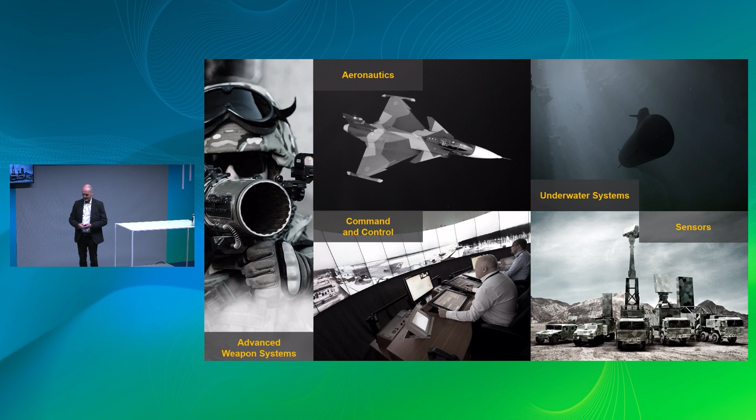If we dive into Dynamics, I will do that for a reason. I'll show you a couple of cases from there, and we have five different portfolios within Saab Dynamics alone. One example comes from the anti-ship missile hanging on the Gripen fighter, in missile systems, and one from underwater systems.

Now, war is a nasty business. Nobody wants it. However, we never seem to be able to get rid of it. I chose as an illustration this one, from the war between Israel and Hamas in 2021, not knowing that we would have another war on our hands right now. It's a good illustration because on the right you have the simple ballistic rockets that Hamas launched, I think over 4,000 of them in a few weeks. And those simple ballistic rockets cost under $1,000 to produce.

Israel responds with its Iron Dome air defense, one of the best in the world. But those are guided missiles, as we can see in this illustration. Over 4,000 rockets were launched. The quality was lousy, so a quarter of them fell down in Gaza or in the sea. But over 3,000 reached Israel, so they needed to launch their missiles to take them out. Over 3,000 missiles. Imagine the cost. They took most of them down, but not all.

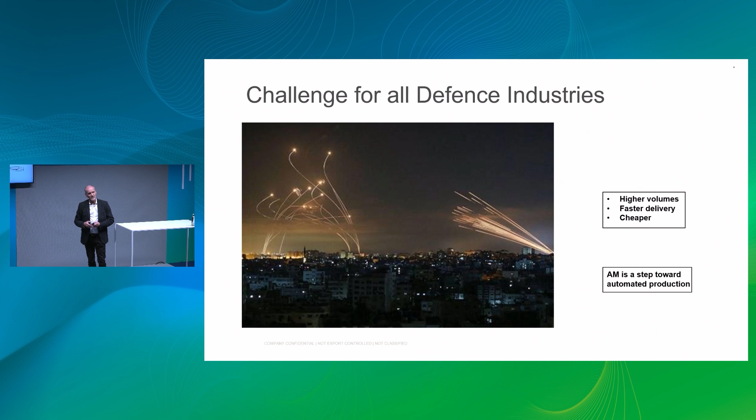So additive has been important for Saab for many years now. We started about 9-10 years ago. We had an assignment from the management team at Saab to collaborate between these different business areas that have such different product portfolios. So I have a Saab AM Group with people from Aeronautics, Surveillance, Dynamics, and Kockums, and also the tech consultancy service, Combitech. Our mission is to devise the strategy for Saab on additive and execute it.

We drive the collaboration within the Saab Group, despite the different product portfolios. We develop Saab common solutions. There is no need to have different solutions just because we can; it's smarter to keep common solutions as much as possible. We disseminate knowledge. Another exhibitor here at Formnext is AMEXCI, a Swedish joint venture which Saab co-owns, and this group is also the point of contact for Saab people towards AMEXCI.

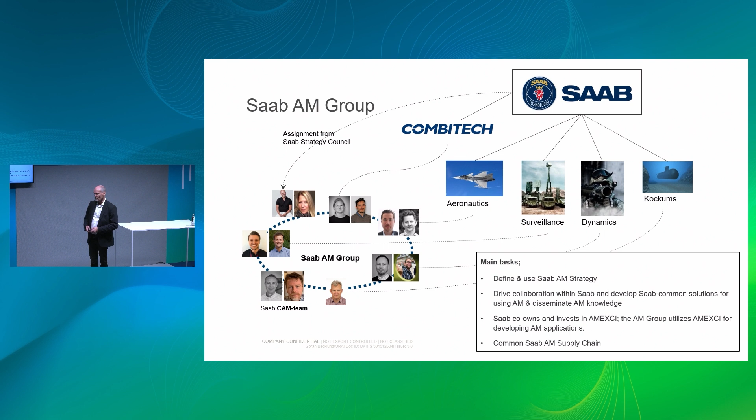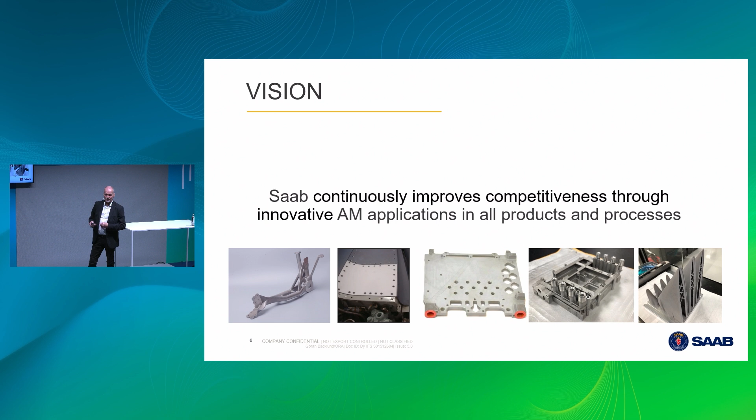And we are devising a Saab AM supply chain because we don't produce our metal parts in-house. Not yet. We will, to some extent, of course, but the strategy now is to use suppliers. Our vision is that we go smarter with additive and improve our competitiveness by being innovative in all our products and processes. And we have some metrics on this.

And I will just show you some examples of applications that we have. One of the first was actually a cool plate. To the left there, it's about this big. And on both sides, you have high power electronics, gallium nitride. And I mean high power. At the surface of the chip, you have a power generation that almost equals the surface of the sun. So if cooling fails, it burns immediately.

And this cool plate is hollow. You have coolant running in, here spreading in the plate, picking up the heat and exits. It's just 4 millimeters thick. And this is an AM design, and the plates sit on a flow distributor, 4 of them in one distributor, and it's all printed in aluminum. Sorry, that was the wrong direction.

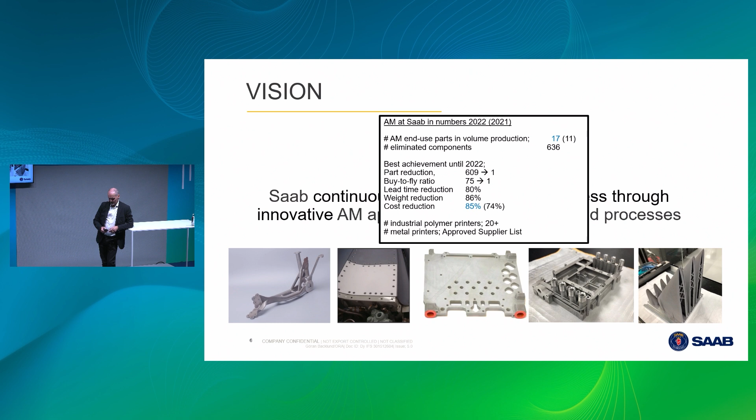Now, it used to be brazed. Brazing is always a risk on leakage, but this one is leak-proof. It's just one part. It's lower weight, which is of great importance because it's a flying system. And the best of all, it's a better cool plate. It picks up more heat than any previous cool plate we had. And you reduce pressure loss due to nicer channels and so on.

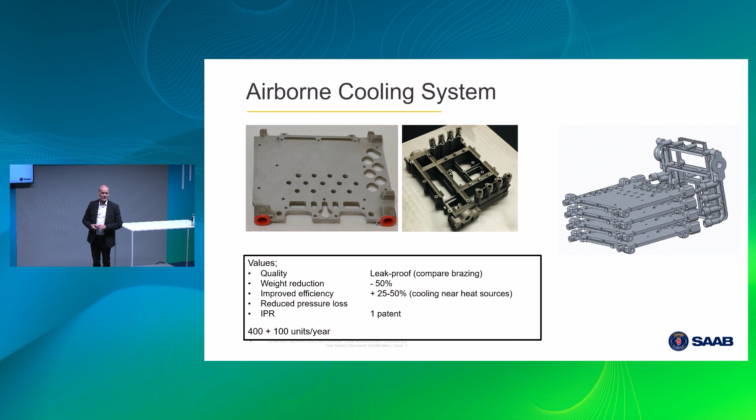And people came up with good, ingenious solutions that rendered 1 patent, which is also a value. And we have it in production, some 400 units per year right now. And it's an airborne system.

Also, here is the one missile I showed in the beginning, the RBS-15 anti-ship missile. Here it's launched from a ship with rocket boosters, and we had a part screening project on that a number of years ago, trying to find some parts that made sense to print. And that is pretty hard on existing products because you're not allowed to change much. So it's not that easy to find good business cases.

But we found the first on this product, and that is the front cover skin, which is on the leading edge of the wings. And it's 4 wings on each missile, so it's 4 front cover skins per missile. To the left here you can see the traditional manufacture. It was 2 stamped halves of aluminum, welded together manually on the back here, and then you riveted a bottom plate to that. In total, 17 components, including the rivets.

With an additive design, we could make it as 1 part, cheaper, lighter, faster, with fewer parts, and actually improved quality, because with manual welding, 3D printing beats that from a quality perspective. So we have better repeatability on geometrical correctness. And this one is now in production, will be delivered to the customer. It's not that important a part for that product, but it's the first.

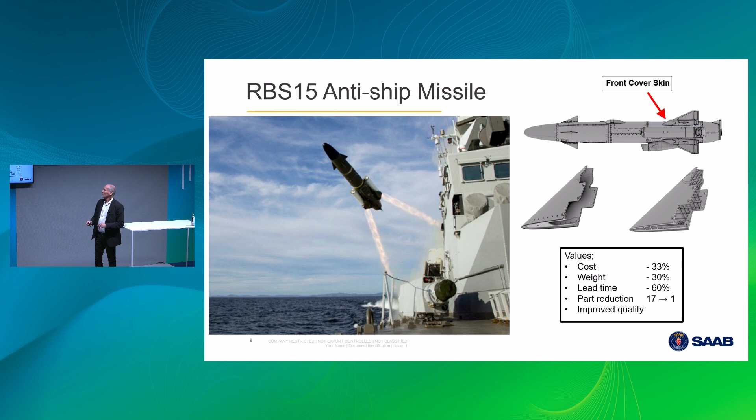We have a carbon fiber version right now, which this printed titanium beats in every aspect. It's half the price of the carbon fiber version. We can make it faster, and it actually beats the carbon fiber in weight as well.

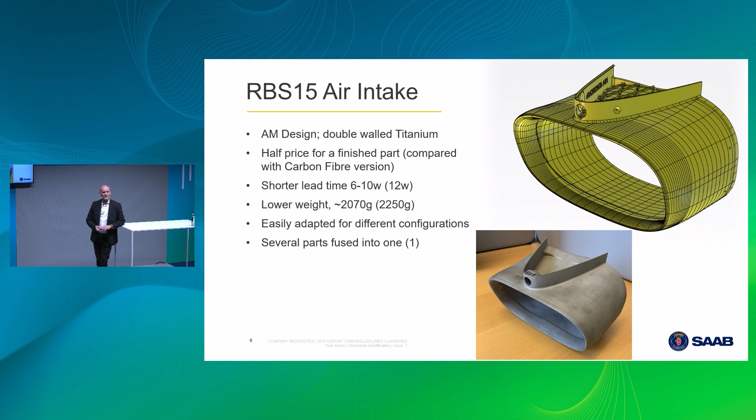Now, if you have a fighter on a mission somewhere in the world, and you have to access the equipment under that hatch many times during the missions, it comes off and on, and off and on. And the risk is when you take it off and put it there, someone runs over it, and you don't have a hatch anymore. So what do you do? Ground the airplane? Take a hatch from another plane, then you ground that one.

So if we can have a container with some polymer production capability out in the field with a mission, we can produce very fast a temporary part while we're waiting for the original part to be manufactured and shipped, but we keep the mission going.

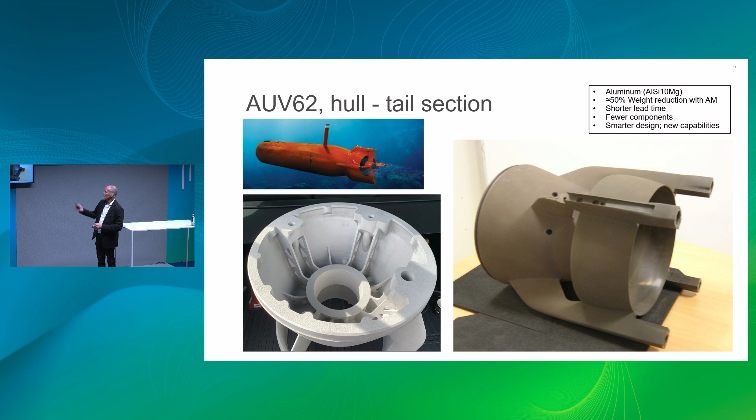So this is also an aluminum part, and we can go down to 50% of the weight using additive and a smart design for additive. Shorter lead times for sure, and we have fewer components. You can fuse in brackets and things like that. And we have other smart designs that additive actually offers for a vehicle like this that I cannot disclose, but it opens a lot more new possibilities with additive to other design features that we didn't have before.

Okay, to sum it up, I see some appealing values with additive, as I've shown you, but I call these ones the secondary values: lower weight, shorter lead times, fewer components, and lower cost. And that's what most of my colleagues fall for. But the great values lie in functional optimization, making a better product. And if we focus on making a better product, better functionality, using the full envelope of complexity that additive can handle, you don't have to focus on the secondary values. You will get them as you go anyway.

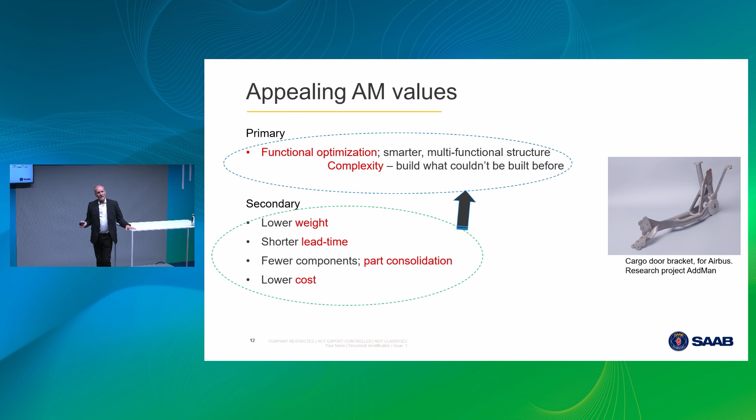But okay, fair enough. Let's start with the secondary values and make some traction on additive within the Saab Group. And eventually, at the end of the day, arrive at focus on making better products. And when we have trained our staff and hired people already knowing additive, there is no limit to what we can do to our products using additive.